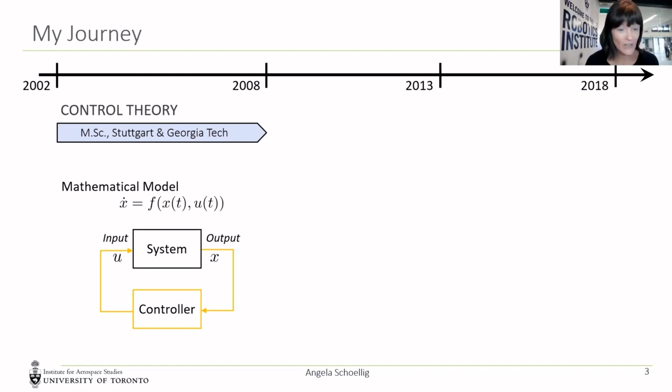Typically, control theory designs these controllers based on detailed mathematical models, often in the form of a differential equation, as you see here. This is what I studied growing up during my bachelor's and master's. If we design these closed loop systems well, we can achieve behaviors that are difficult to achieve in any other way. In my PhD, I applied this to flying robots, and this looked like this.

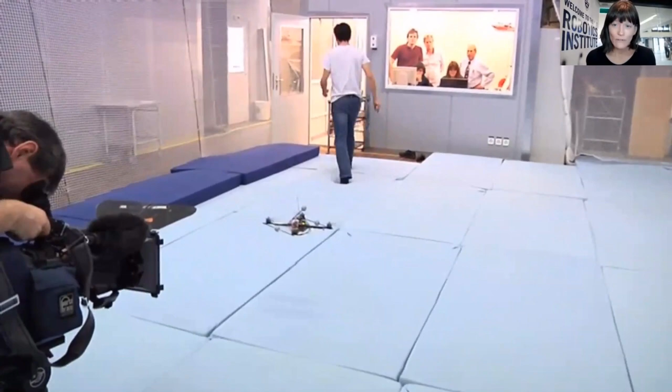We were really interested in showing the physical capabilities of these vehicles, and using control theory to achieve precise, accurate, and highly dynamic motions. These robots receive commands from a computer 70 times per second, and one mistake could make this vehicle crash. So stability here means keeping this vehicle in the air.

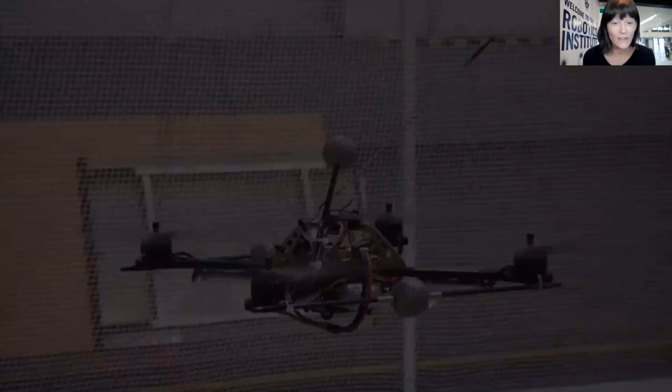Projects in the lab eventually led to collaborations such as this one, with Cirque du Soleil, which eventually became a show on Broadway from 2016 to 17.

In here, the robots are the lampshades. Yes, their motion is pre-programmed and the actor is adapting. But you see the confidence and the maturity of the technology.

This ran around 350 shows on stage on Broadway eventually. It also reflects nicely what robotics is all about, which means expanding what humans can do and express.

From that going forward, I noticed that there are limitations when we rely purely on our mathematical models when operating these systems. Since then, I have been leading a research group at the intersection of control theory, robotics, and machine learning. It's a very interdisciplinary group.

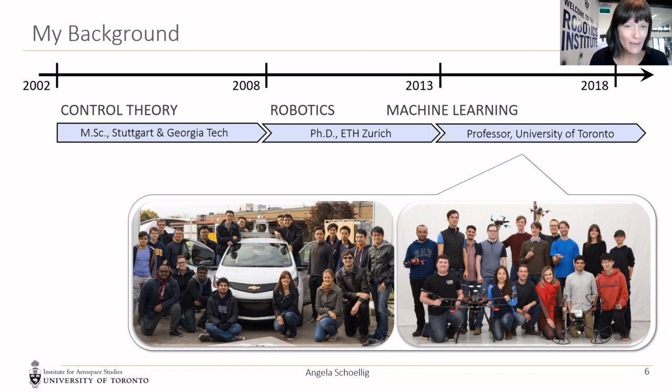And if you come to our lab, you don't only see the students working, but you also see robots moving. I just want to give you a brief impression of what type of robots we usually work with, which gives you some context for the research we do.

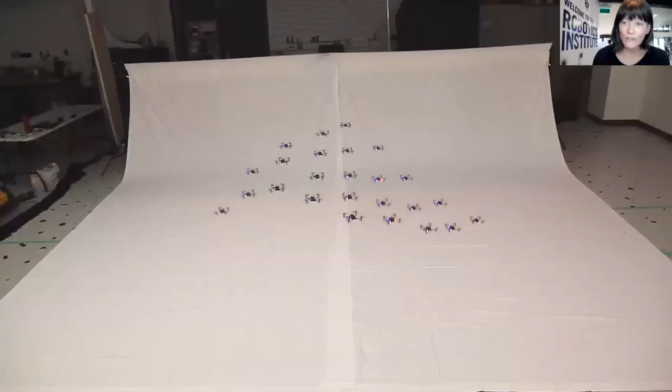Here our goal is to achieve high performance motions for a team of flying robots. We do this to show the capabilities of our algorithms, but we also connect this to real applications.

We are, for example, working on applications for monitoring. This is a mock-up nuclear power plant, and here's how these vehicles could be used to monitor the safety of the building. We also fly outdoors using vision in the closed loop, and the goal here is to fly reliably without GPS.

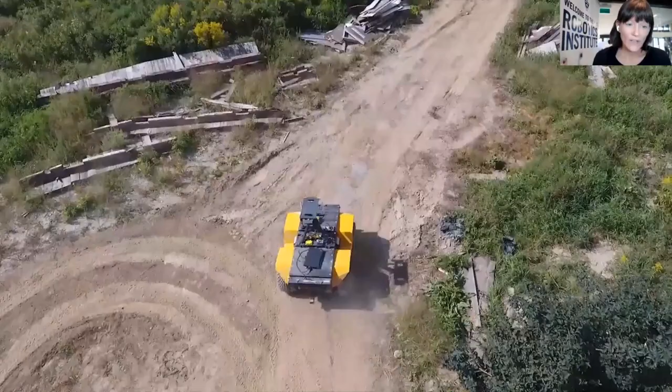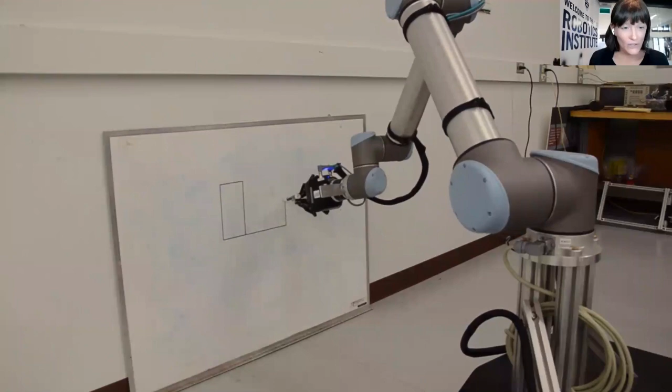Here you see an off-road vehicle we work with, and more recently, over the past 4 years, we have participated in a self-driving competition and built this self-driving car from scratch with a large team of undergrad students, and were successful in winning the competition 4 times in a row. This is the latest platform, a mobile platform with a manipulator arm.

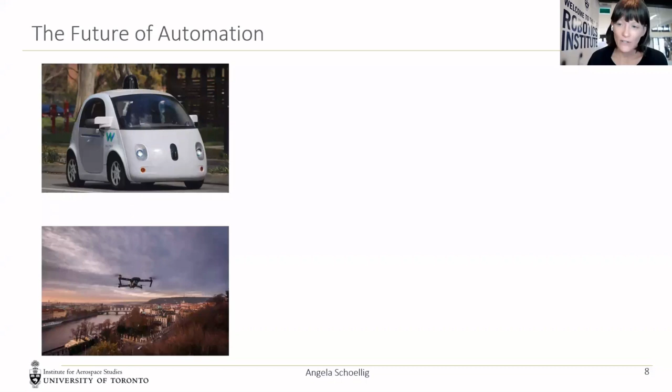So this is the type of robot platforms my team has been working with over the last 5-6 years. We envision a future where robots operate in our human-centered environments and not anymore behind factory walls. Robots are envisioned to navigate our roads or skies, support us in our daily tasks, and interact with us in the workplace.

In all these applications, robots have to deal with large prior uncertainties—meaning things that we have a hard time understanding ahead of time. For example, the interaction between the robot and its environment. We expect robots to actively make decisions and then exhibit a safe and high performance behavior.

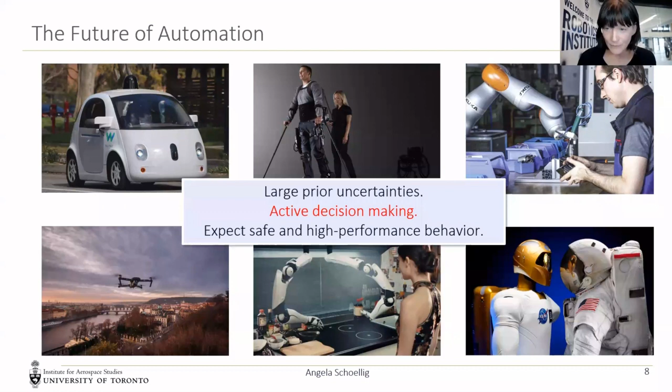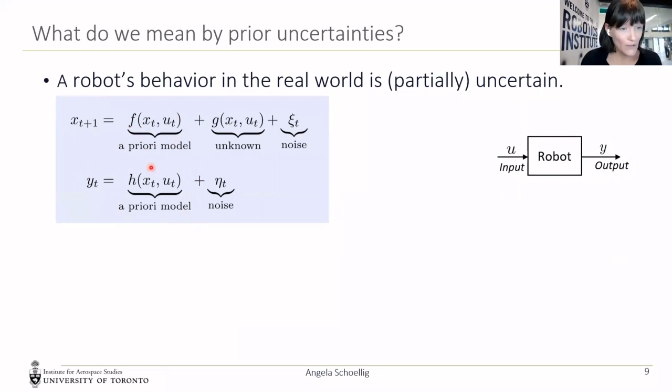So what do we mean by prior uncertainties? Ultimately, this robot is usually built by us or by some humans, and so we should have a good understanding of how it works and how it behaves. That is true, and that is why we account for our prior knowledge, often in these equations, as a prior model.

But in particular, the interaction with the environment is really hard to model. That's where we have these unknown effects that can significantly influence the behavior of the robot and limit the performance if we don't account for them. Interaction with the environment for a flying robot could be the aerodynamics and the wind gusts. For a self-driving car or off-road vehicle, it could be the interaction between the wheels and the road, or generally the interaction with other agents.

So that is what we try to address with the algorithms that I present today. And then what does safety mean in this context? This is very robotic-specific and a specific challenge when we work with algorithms for robots.

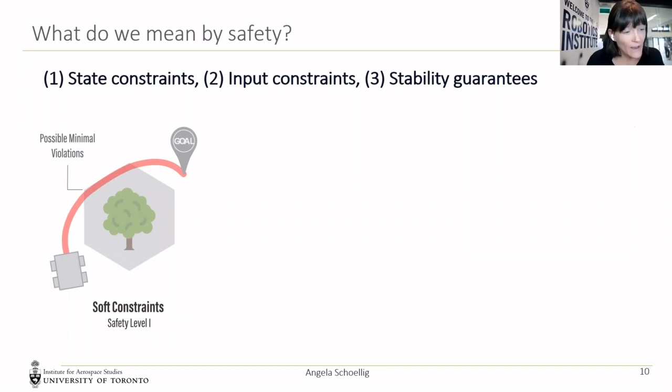One part of safety is state constraints, reflected in this image. If a robot needs to go to a goal and there's an obstacle in the way, we want to have ideally no collisions with any obstacles in the space. So you could think of different safety levels, where safety level 1 is that we try to minimize violations of the constraints, which means we do a trade-off between achieving the task well and satisfying safety constraints.

This may not be enough in robotics, right? Because collisions could still happen. So other considerations or levels that many people consider is probabilistic constraints, which means no violations with very high probability. And lastly, of course, our ideal scenario would be hard constraints, so we can guarantee that we don't collide with any obstacles in the way.

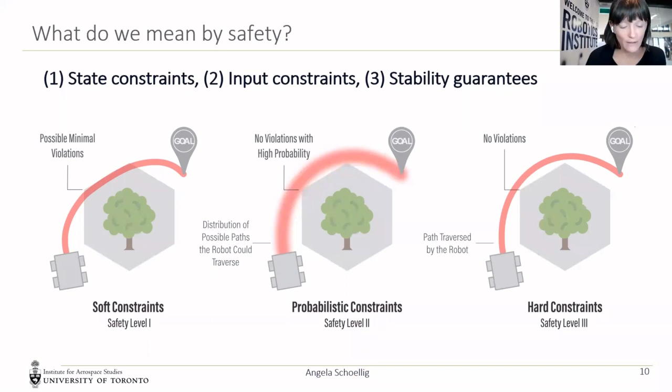Beyond state constraints, safety also means that we operate the robot such that it doesn't break. So we consider the actuation limits, and in addition, we consider that it stays stable, meaning the closed loop behavior remains what we intended it to be. For example, a flying robot staying in the air, or a driving robot staying in its lane. These kinds of safety constraints can be incorporated in this formulation by saying the state needs to be in a certain set, or the input needs to be in a certain set.

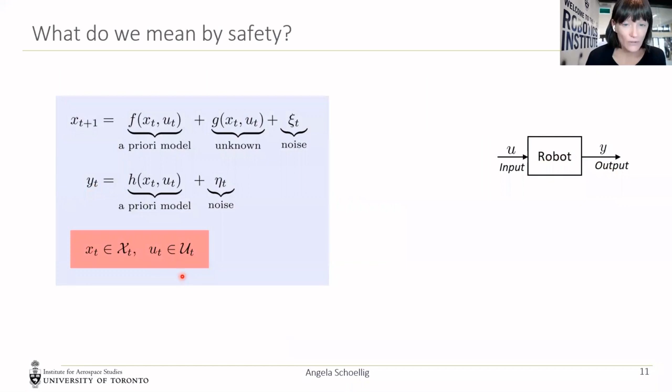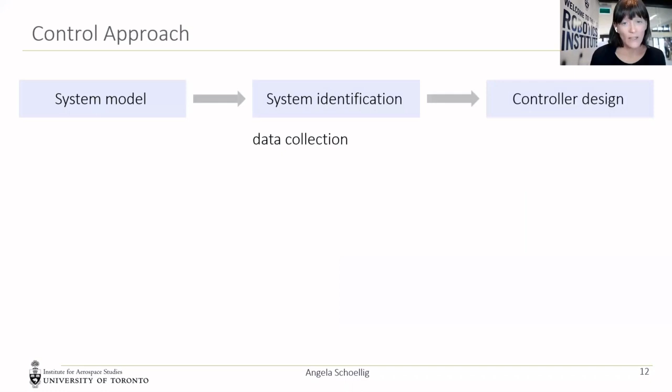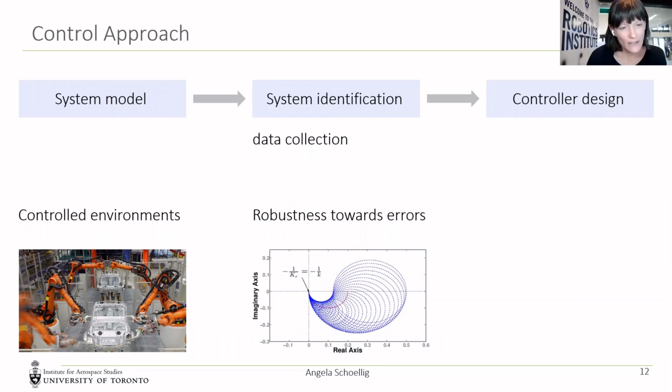So the control approach is that we model the system, identify possible parameters - that was the difference equation I showed you before - and then we design a controller. This works really well in controlled environments. It has advantages such that we can study the robustness towards model errors, so up to which error in our parameters are we still achieving safe behavior of the robot. And we can explicitly incorporate safety constraints in these formulations. This is a typical approach to control of these robots.

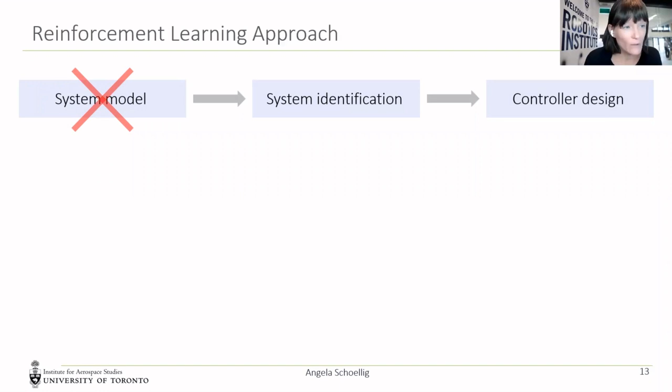The alternative is reinforcement learning, where you start, usually in a vanilla version, from nothing - you don't have a system model. You directly take data samples and then optimize the control behavior. And so that looks usually like this.

In RL, you talk about a learner or agent, which is the equivalent to the controller. It commands actions and then observes what the robot is doing and how well it does on a particular task, which is reflected by the reward. Over time, through more or less random actions, you learn more about the behavior of the robot and what the optimized actions are. This works quite well because you collect relevant data for the task through the reward. You usually optimize the performance in expectation.

So it makes it more difficult to consider the worst case, which is something we want to understand in robotics. And it has been shown to perform very well, better than anything else, in very controlled environments - which could be games, virtual characters, or also very controlled lab environments.

So I tried to set the stage, on the one hand to explain that there is uncertainty in robotics, and on the other hand that we want safety. And that there are two core components: control theory and reinforcement learning. So we recently did a review paper to understand what the state of the art literature in this area is.

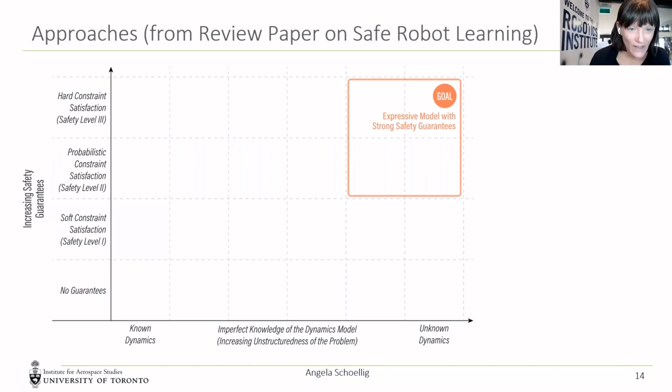So if you look at where we want to go, ideally we want to go to the top right. We want expressive models, even for systems we don't know well, and still have safety guarantees - so safety guarantees and flexibility. Control theory really sits here on the left: it assumes we have a good understanding of the model of the robot, possibly with bounded uncertainties, and then it can design controllers that work really well.

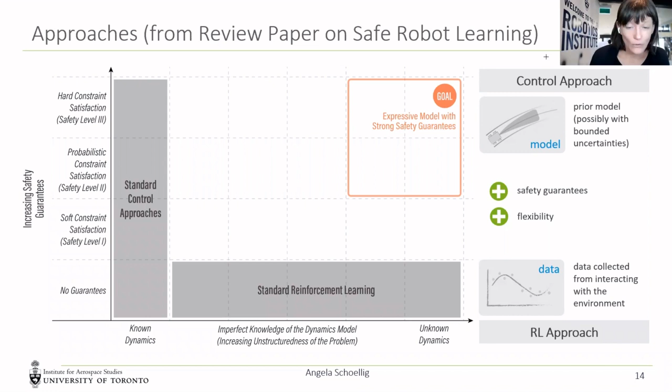Reinforcement learning sits at the bottom here. It makes very little assumptions about the underlying system, but then also provides zero guarantees. So it just collects data and learns from interacting with the environment, but things can go wrong during the learning process.

In the current literature, there has been quite an effort to fill the gaps. The green box represents approaches from the reinforcement learning community that encourage safety and robustness, usually by adding additional terms to the reward. But there are various different ways they do this, and usually they only achieve safety level 1, so they encourage safety, but there are no guarantees.

There are more approaches, usually driven by the controls community, around safely learning the uncertain dynamics. A lot of what I show from my own research falls in this blue category, where you try to learn better dynamics models over time while still providing probabilistic guarantees.

Then there's a separate set of approaches I won't cover in this talk that try to certify any learning-based controller by adding a safety filter. The safety filter will always check if what the learning controller does is correct and safe, and if yes, it will pass it through, and if not, it will modify it. This is the landscape we operate in, and if you want to learn more, I encourage you to look at the review paper.

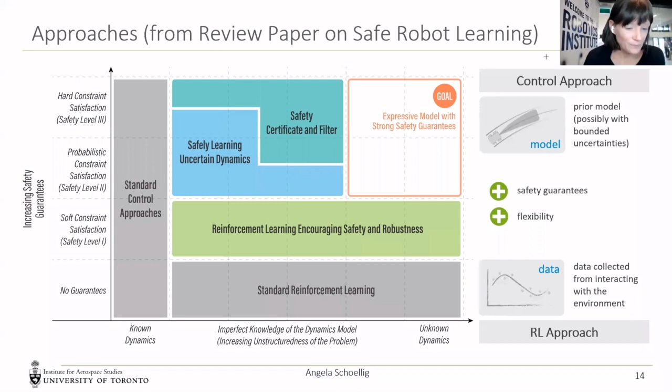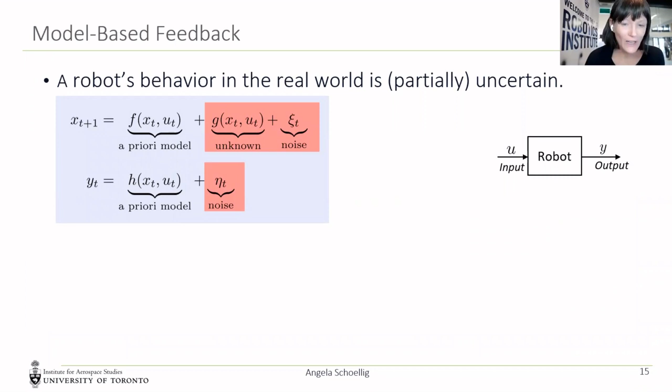A lot of our work falls into this blue category, safely learning the uncertain dynamics. But I want to emphasize that if you have uncertain dynamics, traditional control can still work really well. If I have a standard controller and I know my uncertainty bounds, I can design controllers that work well in a partially uncertain environment, even with these red terms. So model-based feedback control can be robust to uncertainties — we just need to understand what those uncertainties are and their bounds.

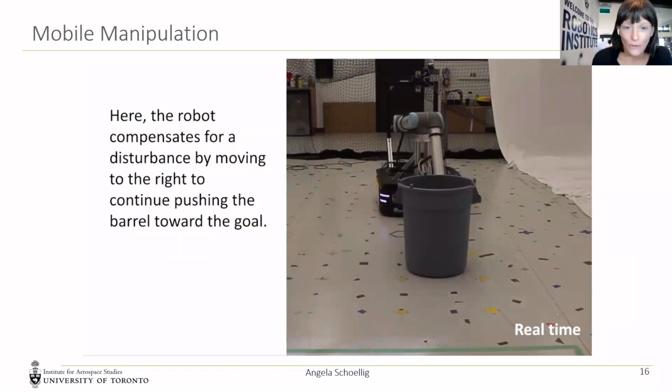I'll give you a few examples. Here, for example, this is purely model-based, from our lab, with a mobile platform and a robot arm. It pushes this bucket — we don't know the friction coefficient very well. We can also disturb it, and the robot can still balance the bucket and continue pushing it. Here's another example, also purely model-based. There's obviously aerodynamic interaction between those robots as they pass through this hoop, but still, pure model-based approaches work.

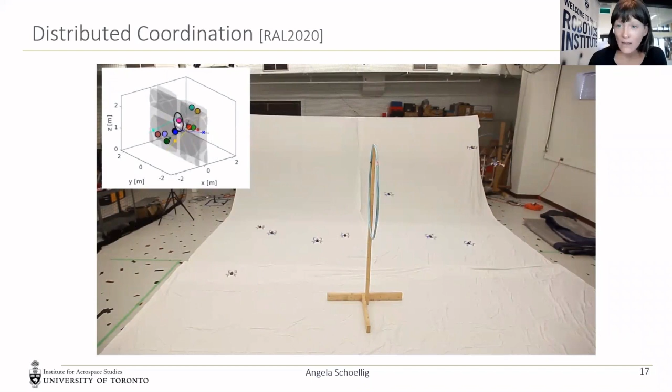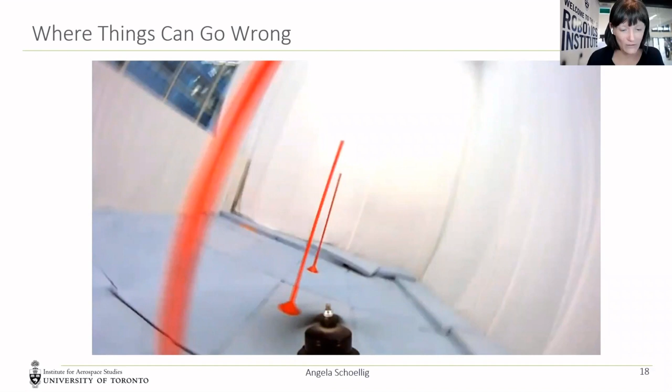But sometimes you don't have a good understanding of the uncertainty, or if you incorporated it fully, it would make the system very conservative. This was my very first kind of problem looking at learning-based techniques: a flying robot supposed to fly a slalom trajectory as quickly as possible. If we don't use any learning and just rely on our models, it does not work, because these aerodynamic uncertainties have a big impact on the robot's behavior, and not accounting for them well just makes the robot not work well.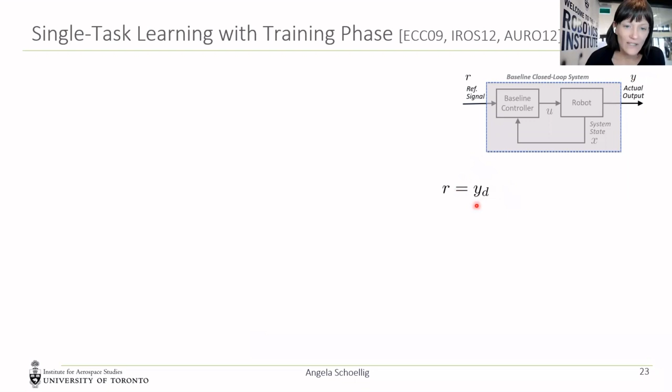So I'll start with the feedback architecture. I showed you the slalom flying vehicle, and the setup looks like this: we have the robot, we have a baseline controller, we send a reference signal to the controller representing the task the robot should do, and we observe how well it does the task by looking at its actual output or performance. Ideally we want Y to be equal to YD, or ideally R equal to Y, and as a result we set R to be the desired output.

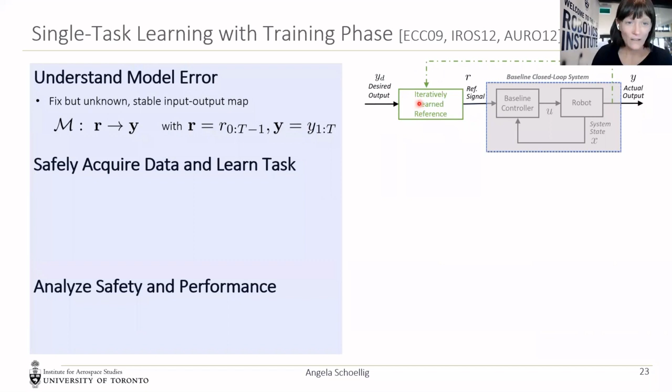The first way we looked at this is, okay, we can understand how a sequence of R inputs maps to a sequence of Y outputs. And then we can try to modify the R inputs in a way that ultimately gives us the desired behavior at the output. So we iteratively modify the reference signal in a way that achieves the desired output.

You can do this through basically a policy gradient method where you use your approximate model of the system. So it looks like this.

You take the reference signal from the last iteration, and then you modify it by looking at how big was the error in that iteration between the desired slalom path and the actual one of the robot. And then you use your rough model to map this back into how should we modify the reference signal to compensate for this tracking error.

And this model, actually we use a simple model from physics, not a very detailed one. If you do this, you can show that you can reduce the tracking error monotonically, and there are no stability issues, because as long as you guarantee that the gray box is a stable closed loop system, and you guarantee that these R signals are bounded, you never have stability issues. So this kind of underlying feedback loop helps you to guarantee stability.

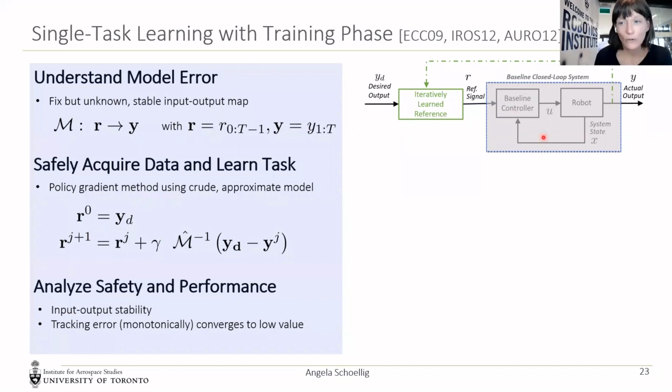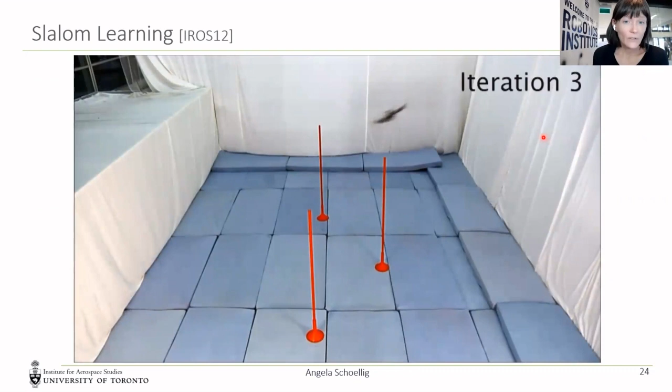And then you can actually learn. Here we learn without the poles, because you can imagine that initially we would hit the poles. After 3 iterations, we are confident that the robot can actually go around the poles.

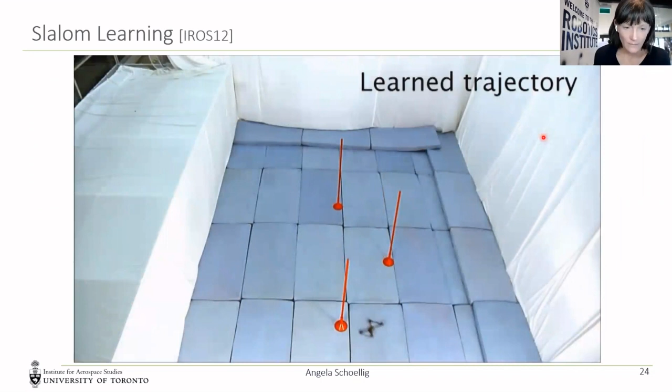And here you see a different configuration that the robot had to learn from scratch, and you see the learned behavior.

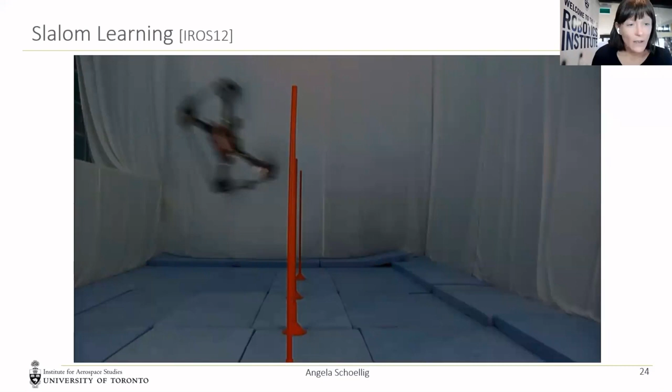A similar approach can also be used to learn triple flips with a quadrotor, where the robot should come back to the position where it started, and in between do 3 times 360 degrees of rotation. So even for that task, you can do a very similar approach, actually.

They use a model to guide you towards a desired reference signal. The advantage of this approach is that you have this underlying controller that helps you, and you use a simple model as a gradient to show you the direction of correction. The disadvantage is that you have to learn each task from scratch.

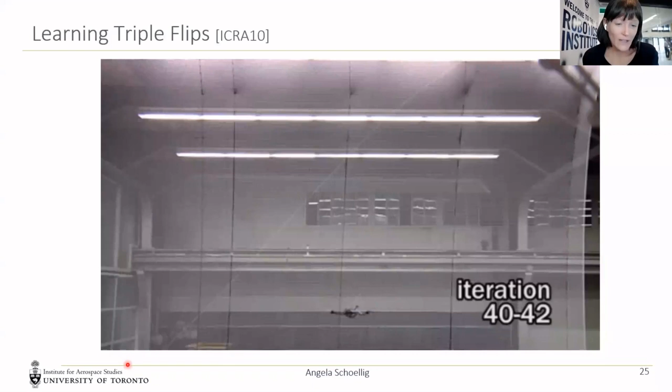So we looked at, can we avoid this by adding this red feedback and basically learning an inverse model. So instead of doing this for a single task, we now try to learn this green box that is the inverse to the gray box, such that the goal is still the same: y desired is equal to y in the end.

This works well because we already have an underlying controller that makes the system operate in a repeatable manner. Our prior knowledge was very helpful in this setup as well, because by roughly understanding what the robot does, we were able to understand what the input features here to this green box should be, which we model as a deep neural network, but probably many other regression techniques would have worked.

Interestingly, from a dynamic systems understanding, the inputs are the current state of the robot, and the desired output are R steps into the future, where R is the relative degree of the system - basically the internal delay of the system. So you don't need a full sequence of desired output values, you just need the one that is R steps in the future. And what R is for a particular black box system, you can identify with one single quick step identification experiment.

And again, this green model is learned ahead of time. It's learned once, and it's an inverse model, and we keep it like this, we don't update it. So at least not in the basic version of this approach.

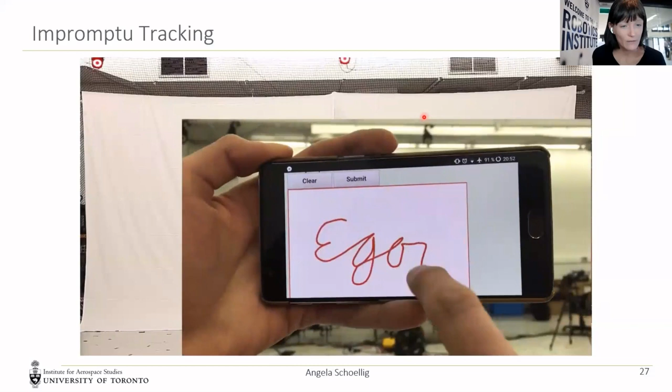So here you see people coming to the lab, drawing things. The green is the learned version, whereas the gray is what the system would have done without this correction block.

We also use this for ball catching. This shows that this approach can be used as a black box with any underlying control system, even if you don't know it. So here, we don't know the detailed low-level controllers in the base of the vehicle or the arm, and we cannot change them, but we can add this additional module to improve the performance.

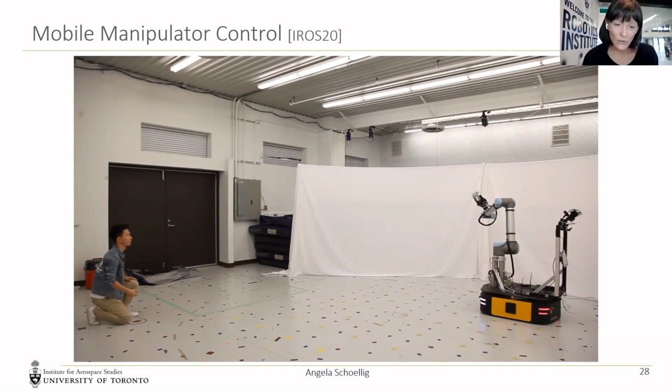And so here you see, this is a very challenging task. You have to be correct in time and space to catch the ball. And here are a few successful cases.

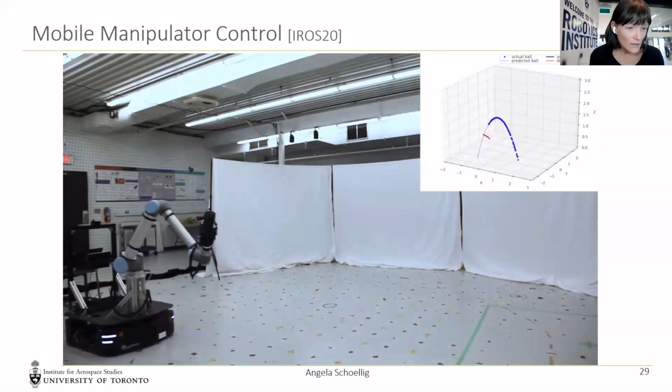And here's a very close-up view, so it's also a very, very narrow opening. So you have to be really, really accurate in time and space to catch the ball.

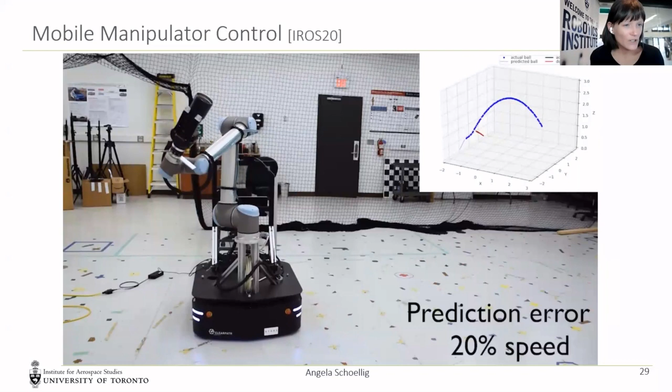We are not perfect, so for example here, the prediction error was incorrect, and here the tracking of the robot was not perfect. So we also have to predict the ball, right? And this shows you that with the learning module, we achieved around 30% improvement in the catching rate.

Just by improving the tracking of the robot and the arm. So the exciting thing is that you can really apply this idea to any black box control system, and you should get better performance.

And so the next, last thing in this section I wanted to show is what happens if this uncertain component is actually changing over time. Typically in most learning approaches, also RL, you assume there's something unknown, but it doesn't change over time. But that's not true in robotics, where we have wear and tear, change of weather, change of the environment in general. So what happens if this changes over time?

You can have different philosophies about this, but one way is we replace the standard controller in this baseline control system with a fast adaptation. This means a very fast adaptation that tries to react to these time-varying changes in a way that the dashed box stays the same. And then anything that we discussed before still applies, and we can still apply it.

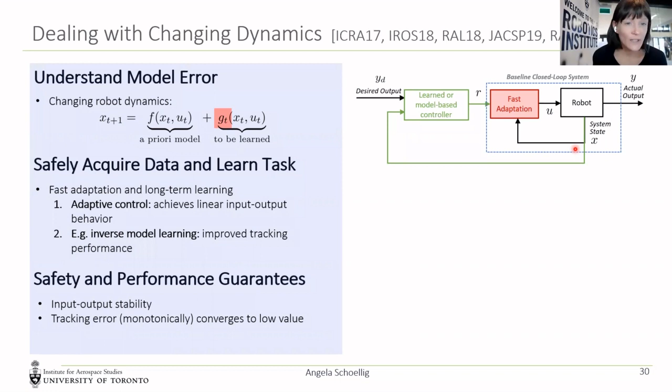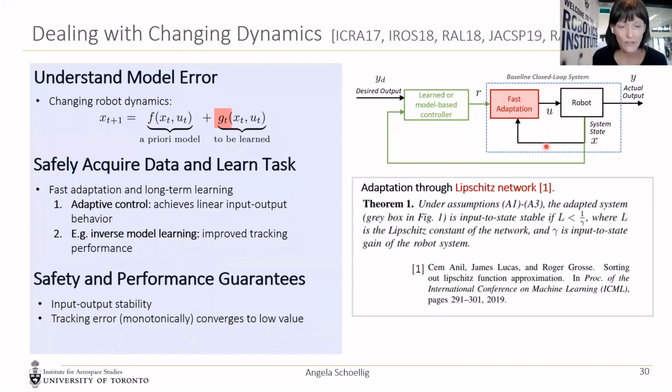A very recent work is where we do this fast adaptation through a Lipschitz neural network and can provide guarantees with that. This paper is called Bridging the Model Reality Gap, because you can also use it to learn in simulation and then go to the real world. This change from simulation to real world can be accounted for and compensated for by this fast adaptation scheme. So this is also a way to do sim to real.

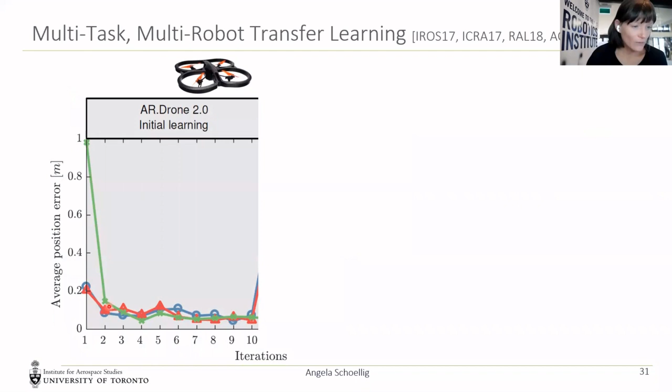And so here's just one example. When we do a similar slalom trajectory with a quadrotor with different underlying baseline controllers, we can learn - this is what I showed you at the very beginning - we can learn the slalom, but then we switch to a different vehicle, so there's actually a discrete switch in dynamics. And if we have standard underlying controllers like PD or PID controllers, basically the system has to relearn from scratch.

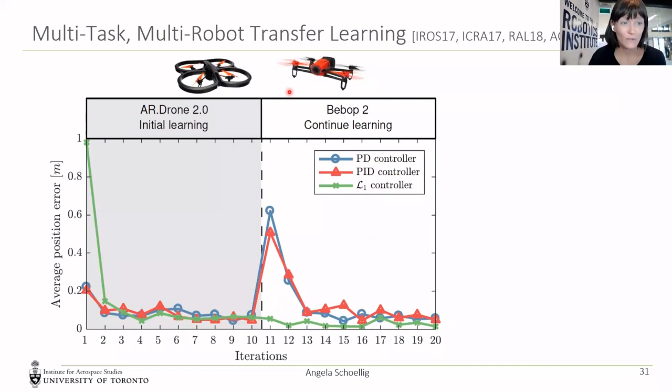But if we have an adaptive controller here, a specific one, the L1 adaptive controller, then we don't need to relearn the task, even though we switch dynamics. So that's very powerful.

And so you can also use this to go from a source system to a target system and also change the task. I don't want to go into too much detail, but basically

these white filled circles show how well we do with no learning. The solid circles show if the target robot learns the target trajectory through iterative training. And these box plots show how the transfer knowledge from a different system can be used. And you see that by transferring information, for example through some adaptive loop as I showed you, we can get a 74% error reduction with transfer compared to not learning at all. And you see we are very close to what we think is kind of the best we can do, which are the solid red dots.

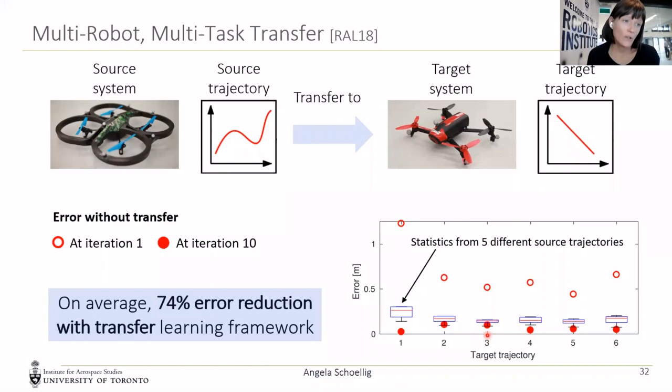So this means you don't have to do any training or learning on the target system. You just use what you did from the source system.

So overall, all these approaches that I showed you relied on a clever feedback architecture and also relied on ideas from control theory, such as very fast adaptation together with a more high level, slow time scale learning. Because of the feedback architecture, we could guarantee stability and give some guarantees around performance, but all these approaches require a training phase and cannot explicitly account for state constraints.

And so the next section tries to address those two points. Can a robot learn as it operates and just get better as it goes? And can we explicitly guarantee state constraints? And as a reminder, state constraints are usually expressed in this form, that the state is in a certain set and the input is in a certain set.

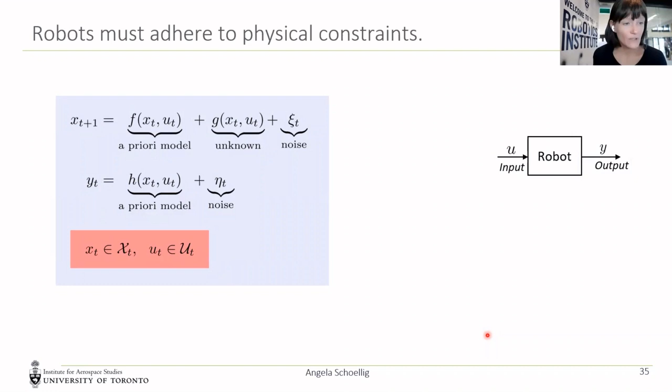And then we use a robust controller to take this uncertain or stochastic model and make decisions that are probabilistically safe. The typical one we use is a nonlinear robust model predictive control approach, where you formulate the decision-making as an optimization problem. You take into account the Gaussian process. You aim for a probabilistic constraint satisfaction, so the probability of X being in this state set is large, something like 0.99.

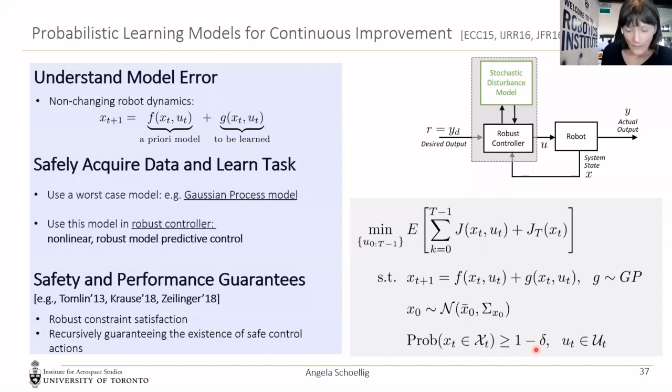And so there have been more recent works. This is quite an active research area. We and other groups have tried to also provide formal guarantees around stability and recursive feasibility for these types of approaches. But I don't have the time to go into the details of the proofs, rather want to show you how this looks.

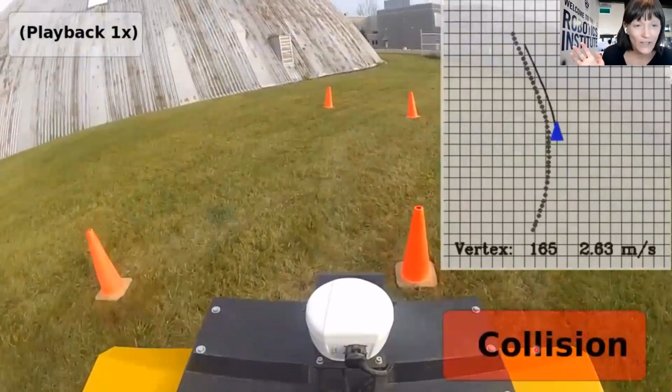So here you see a robot without learning, and we constructed it in a way that it really hits those pylons because we have model errors. We used a simple unicycle model, but didn't account for the dynamics of the robot.

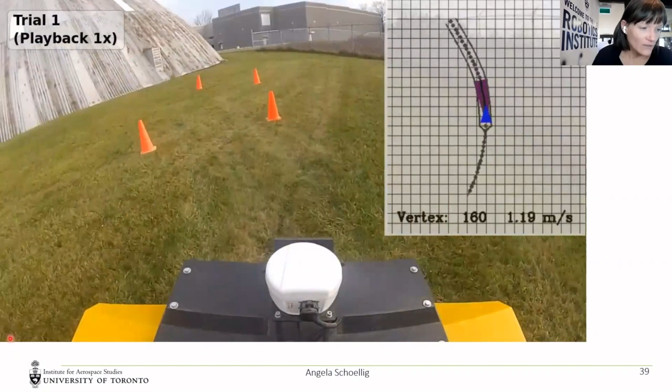And then if you use the approach I showed you, initially the robot is conservative, and it makes sure that over a prediction horizon, which is this purple envelope, it stays within the state constraints. So you see that the purple envelope is kind of touching on the constraints, so over the next 3 or 4 seconds, we don't want to leave the state constraints.

And then as we collect more data, this envelope is smaller, and over the same prediction horizon, we can drive faster while not hitting the boundaries. So the prediction horizon stayed the same, still 3 seconds, but now the robot in those 3 seconds is predicted to drive much further because it can now drive at a higher speed without the purple envelope hitting the state constraints.

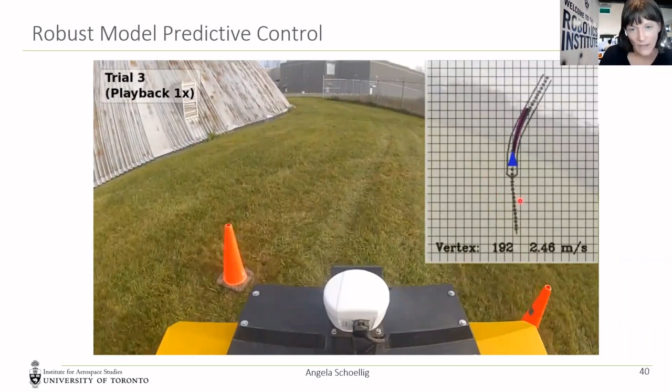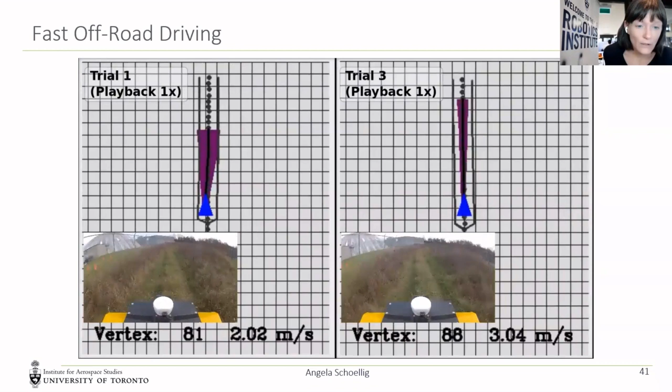And so eventually, you can see here on the left is the first trial through a real off-road terrain, and on the right is the third trial. And all the data collected can be used to reduce uncertainty and drive faster.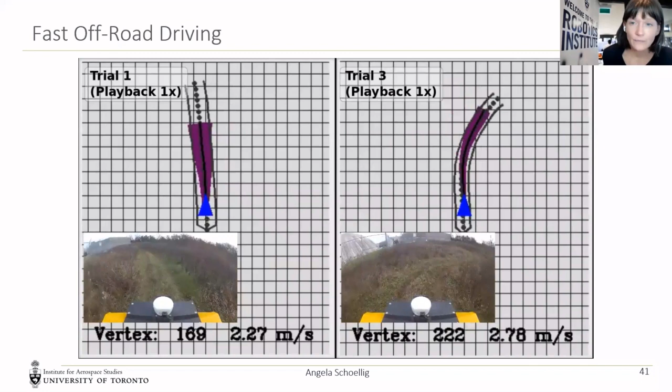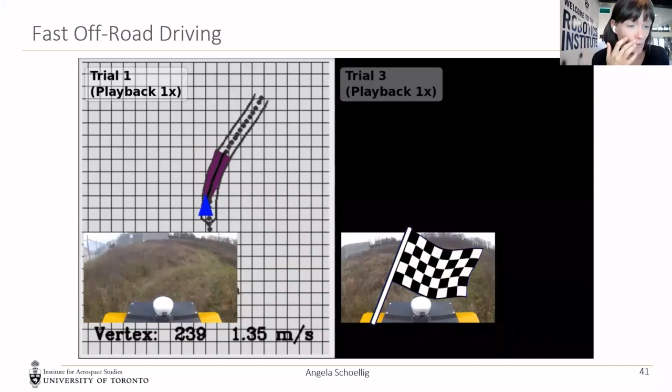And so it finishes this part of the path way ahead of what it did in the first trial. Importantly, this approach allows us to incorporate every data point as we collect it. I showed you the first, second and third trial just to allow a comparison, but it allows us to incorporate data as we collect it. We can start the robot in a safe operation state, and then just optimize performance as we collect more data. There are many open questions around these types of approaches.

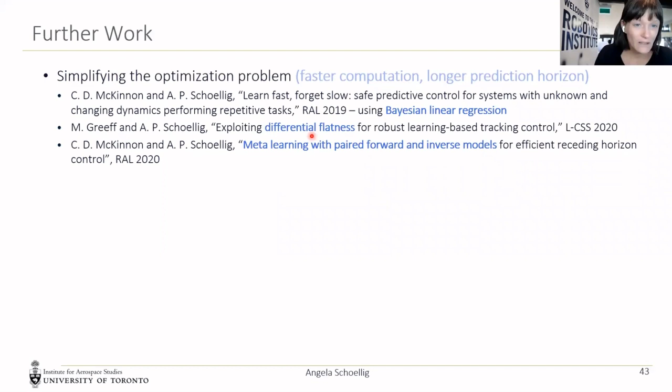A lot is also around how we simplify the optimization problem to achieve faster computation and therefore longer prediction horizons. We have a number of different works in this area. One I want to emphasize briefly is of Melissa Greeff. She's soon defending her PhD thesis, and you can see her work where we leverage differential flatness, a certain dynamics property of many robots, to make this a very tractable problem.

And you can also do this in a more formal setting. I point you to a safe model-based reinforcement learning paper we did, where we incorporate these ideas of Gaussian processes in a full reinforcement learning framework.

One more practical approach with Gaussian processes, slightly different from what I've shown you, is you can also use them to safely and automatically tune controllers. Everybody who is a controls engineer in the audience knows tuning controllers is not easy. We usually do this manually. I usually have to do it again on the real system, even though we tuned it in simulation.

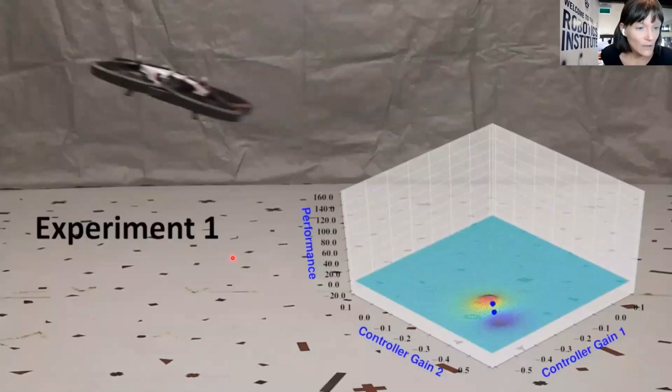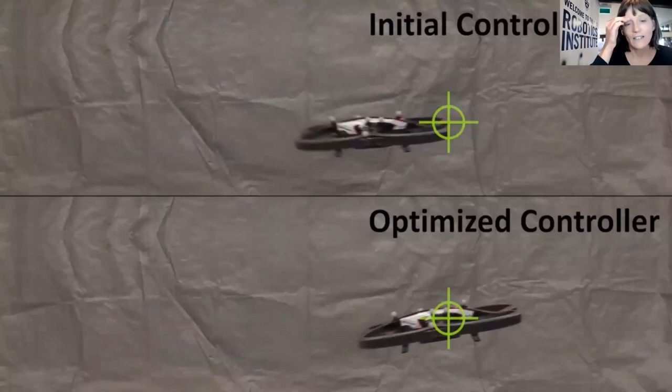So here is some work where we leverage safe optimization based on Gaussian processes to optimize the two controller gains by measuring the performance on this particular task. So it's very task dependent. Here you see, in the end, we found the optimal gains for this. But again, this is still more of a toy problem, where we optimize over two parameters.

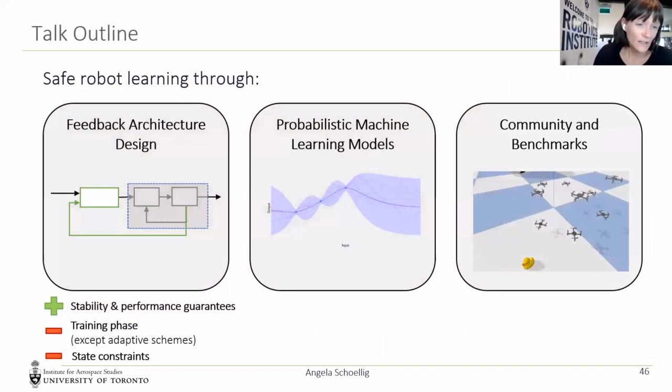So overall, these types of approaches allow us to operate the robot from scratch, without a training phase, and explicitly incorporate state constraints. I still want to emphasize that all these approaches, to provide guarantees, still make certain assumptions. Otherwise, there's no way you can provide guarantees. But they combine ideas from reinforcement learning and control theory, or machine learning in general and control theory, to improve the performance of robots in the presence of uncertainties.

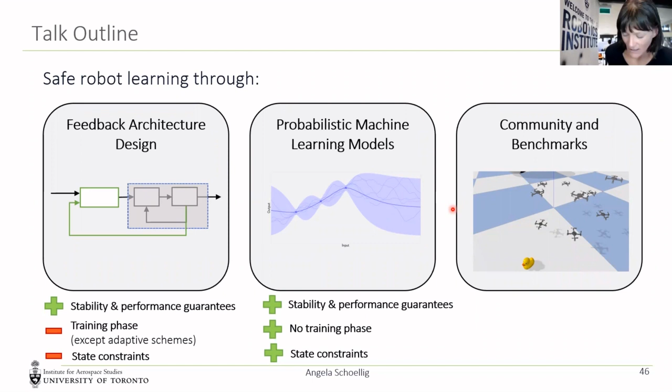The last part I want to briefly talk about is our efforts around creating a community and benchmarks in this area. The first one is we recently published a paper on safe learning in robotics, where we consider approaches from both the control theory community and the reinforcement learning community. I think really both communities are driving this topic, and often there's no exchange between them and a lack of understanding of each other's approaches.

So we tried to give an overview of the state of the art in this review paper, and also include some open source code where we implemented approaches from the controls community as well as the reinforcement learning community. This led to our next effort: to open source all of this code and implement more approaches from both communities, approaches that consider safety and could eventually work on real robots. This is a simulation environment.

There are more than 12 types of approaches implemented right now, and I've also seen some first papers using it to evaluate their approach. So I really encourage you to look at this. I think it's a great way, if you develop something new and want to compare it to existing methods—those methods may already be implemented in safe control gym, and hopefully comparisons this way are easy and you save time by using it. That's our goal.

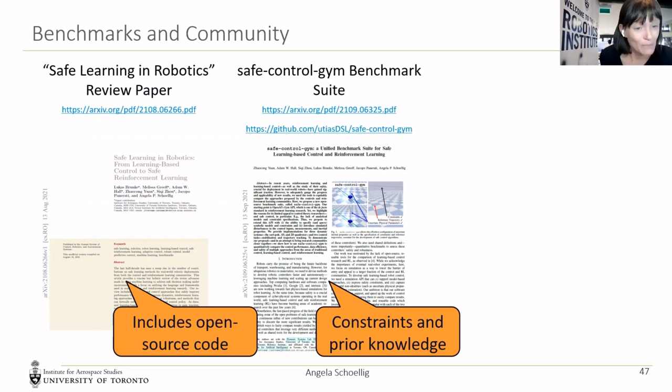We really hope that people adopt it and contribute. And if you code your approach up in this framework, you can make it open source and other people can benchmark against it.

There's lots of other efforts. In particular, we have a workshop at ICRA next week on Friday on basically benchmarks and simulation and how to eventually move algorithms to real incorporate these kind of learning algorithms in real products in the real world. So look out for the ICRA workshop this Friday.

I'm also giving a talk on the safe control gym benchmark suite, just the code base, on Monday next week at ICRA. Other efforts that we are doing are all on saferobotlearning.org on the webpage. There have been previous workshops and all the workshop talks are online. So there are quite a few resources by now. You can also sign up to a mailing list there.

If you look at our review paper, we formulated this whole area of safe robot learning as an optimization problem, because that kind of was the easiest way to connect reinforcement learning and control theory. I don't want to go into all the details, but ultimately we then define the safe learning problem as a problem of mapping prior knowledge and data to the best decision-making policy pi, or the best controller pi. So combining both prior knowledge and data for the best control.

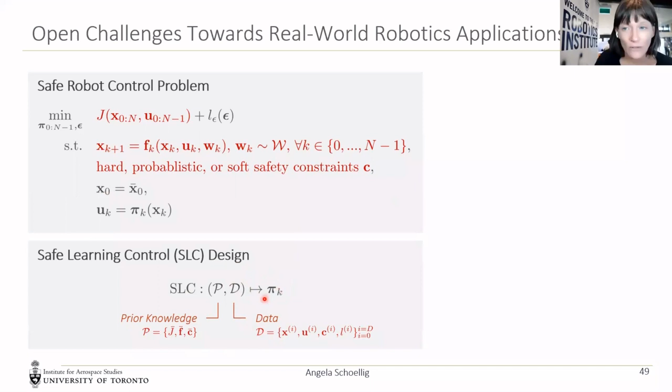And there are lots of open challenges, and they are highlighted in the paper, but I want to just emphasize that this is really exciting, and we have lots of work to do to make these algorithms really useful for robotics products in the end. And one is, and there's a typo, broader class of systems. So none of the approaches today consider hybrid dynamics or soft robotics or partial differential equations.

They all make the assumption that we can measure the full state, possibly with a bit of Gaussian noise, but they don't consider that we may have just images as measurements, or other high dimensional sensor data from multiple sensors. And we also need to solve the state estimation problem as part of this. So all of them assume right now somehow you have a good sense what the robot's current state is.

Many of these approaches are also not ready to be scaled to large scale systems, and are not necessarily sampling efficient or computationally efficient. In robotics, this really matters, right? Because you need to make decisions at high rates of sometimes 100 hertz or higher. And then, as I said, if you want to provide guarantees, it all relies still on some assumptions, and verifying that these assumptions are correct and possibly adapting them is also something that is not done in these approaches.

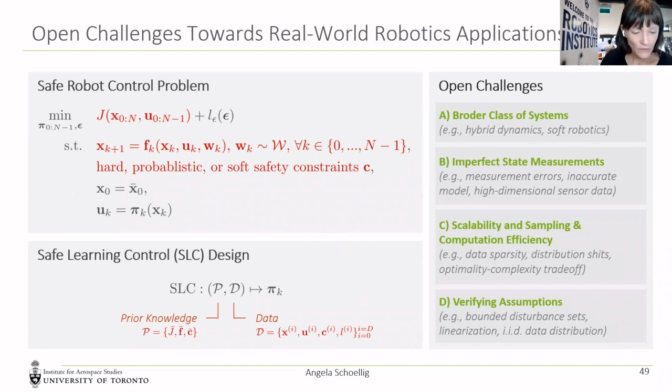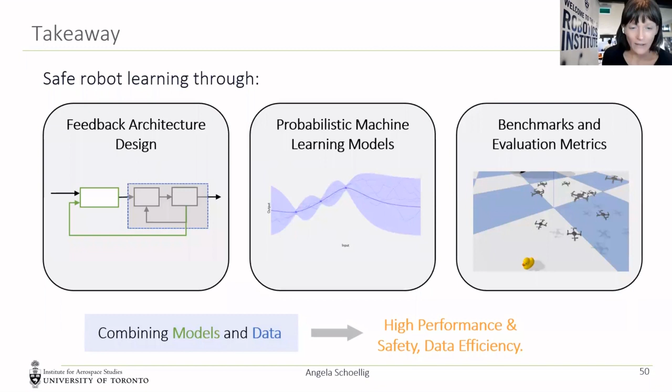And so lots of work to do, but the core, I think, is that many of these approaches combine some models with data. And I think this is also the key to eventually achieve high performance and safety in these embodied physical systems that are actual real world systems moving and operating in the real world. And so I think there's a really exciting area of applying machine learning in robotics, because it has challenges that typical machine learning applications don't have: one being safety, another one being that we really aim for data efficiency, because data is expensive, and that these systems are operating in the real world where the environment can change over time.

Great. So Angela, thank you very much for the very clear and inspiring talk, and I can certainly recognize many problems, and I certainly agree that this is exciting and lots of work to do, but also lots of opportunities.